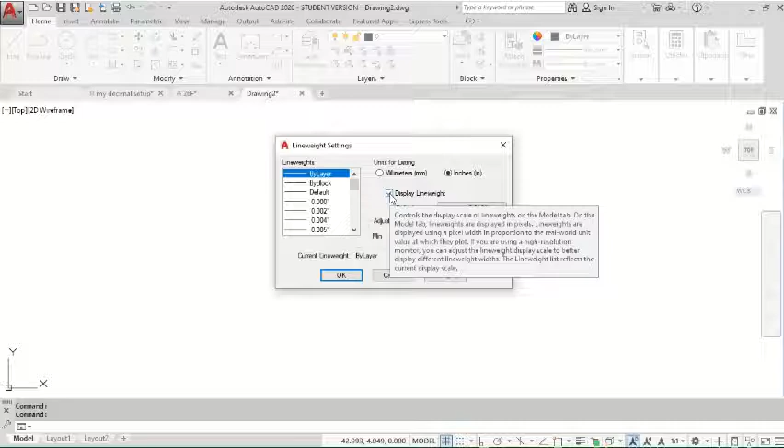On your line weight settings down at the bottom, right click on that and select Line Weight Settings, or you could go all the way back in through Options, but right click on your button on your access bar, it's quicker. We want inches, we want Display Line Weight, and we want to pull this back. They have it set to just below the halfway mark, so we'll pull it over to about where they have it. And okay.

Okay, so now for exercise 26A, we have to create layers, because if we look up here, we don't have any layers. So it says we're going to have to create layers, and we're going to have to load new line types: Center 2, Hidden, and Phantom 2.

Okay, so to create your layers, what you need to do is go into your Layer Properties. If you don't remember how to create line types, go back and check lesson number 3.

Okay, so you're going to go through and create these layers. Make sure that your viewport layer, your print, is turned to off. Make sure you add your center, your hidden, and your phantoms. Change your line weights and set up your colors. Once you're done, make your object line layer your current layer.

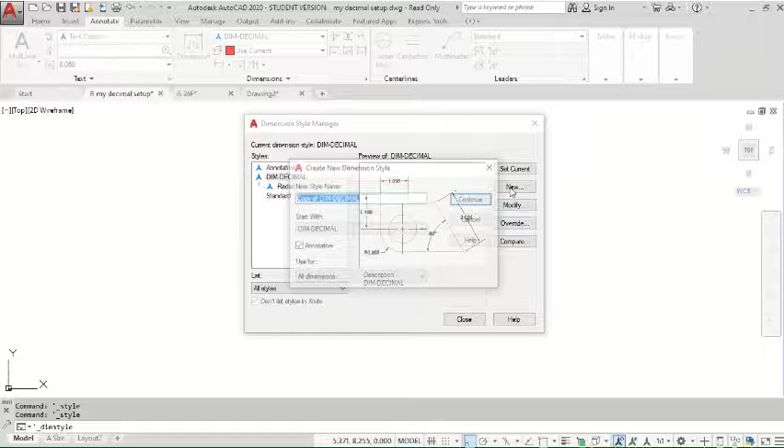The next thing we need to do is create a dimension style. So you're going to go to your Dimension tab, select the flyaway, select New. You're going to call it Dim Decimal, and make sure that Annotative is turned on. Then you need to go through the tabs and set them up to match what's shown in the Dimension Style Manager in your book. Once you're done, we want set current and close.

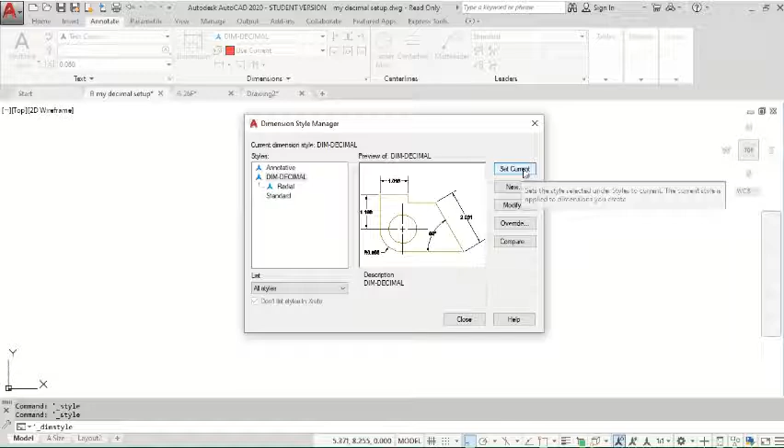Okay, so now, very important, we want to make sure we save. So Save As - they ask you to save it as a template. You can save it as a template if you want, but I'd suggest just saving it as a drawing file. Okay, so that takes us through exercise 26A.

So once you've done your Save As, for exercise 26B, we have to work on doing a page setup. So you already have your decimal setup file open. You want to then, on Layout tab number 1, right-click and bring up the Page Setup Manager. Okay, so in your Page Setup Manager, you want to do New.

We're going to do Setup1 under the name. Select the default output device. If that's your printer, just pick your printer. Since you're probably doing it at home, you could pick your own printer. If not, just select None.

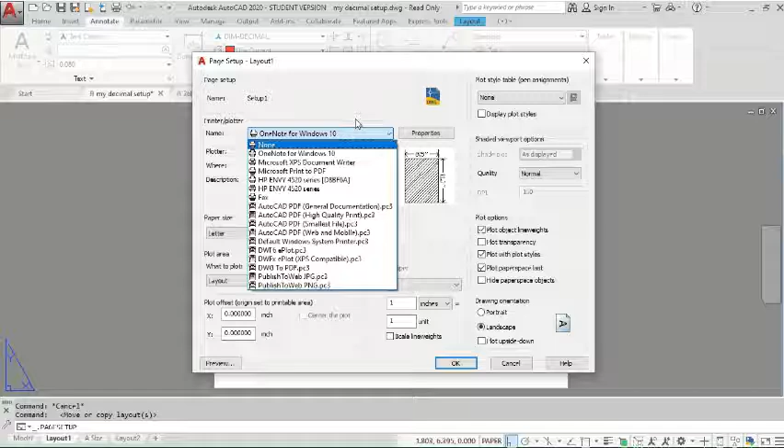Okay, so then in here, go through, set up your printer, select letter size, make sure that these are plot offset, that they're both set to 0. We want our scale at 1:1. We want it to say inches. Right now they have the plot style left at none, so we'll leave that alone. You'll end up using monochrome, but we'll just leave it set the same as what they have for now. We want to make sure that we have Plot Object Line Weights, Plot with Plot Styles, and Plot Paper Space Last, so these 3, and Landscape. Then OK.

Select your Setup1, set current, and close.

Okay, so now your Layout 1 tab, you should have a sheet of paper displayed on your screen. The sheet is the size you specified in the page setup, and the sheet is in front of your model space. So just right click on that tab, your Layout tab, and rename it to A size.

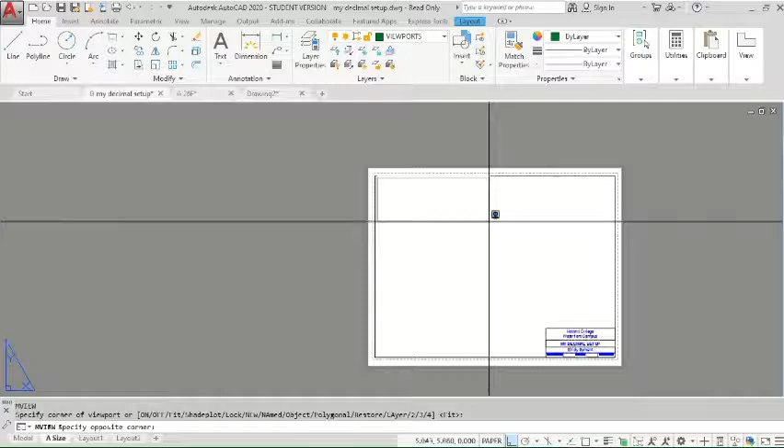We're going to type MV for make view. We're going to put our first corner up here inside of our border. So make sure your snaps are turned off. We're going to bring our second corner down inside our border just above our title block.

Okay, so we're going to confirm. We're going to click inside it, confirm that our model button is showing down at the bottom because we clicked inside our viewport, we activated it.

We're going to zoom all inside of our viewport. We're going to change our viewport scale to 1:1. And then we're going to, very important, lock our viewport.

Then you can go ahead and save again as exercise 26D. Or save as your regular decimal setup.

Okay, so the last part before the final exercise, 26E, is plotting from layout. So we have our decimal setup file open. We're going to select our A size tab. We're going to right click on it. We're going to select plot.

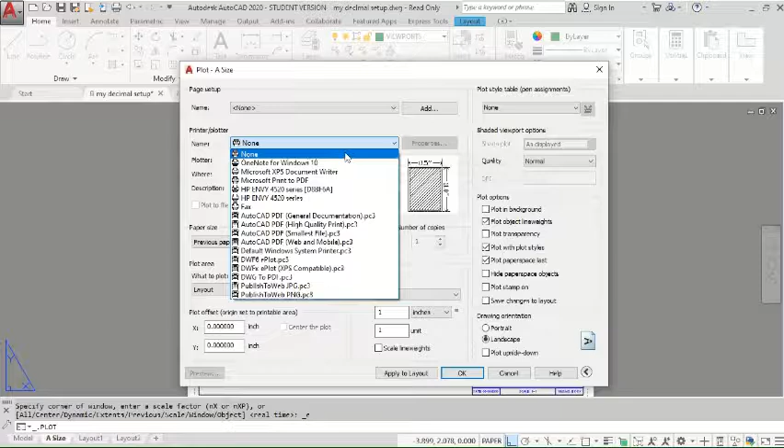If you get an error, mine's because it's looking for a printer I don't have here. Okay, so then go through, set up everything to match the settings that are shown in your book. So whatever printer it is that you're using.

Make sure you have letter, make sure you have layout, your offset is set to 0, scale is set to 1:1, we have inches, we want to switch to monochrome for our pen assignments. We want plot objects, plot transparency, plot styles, paper space, landscape,

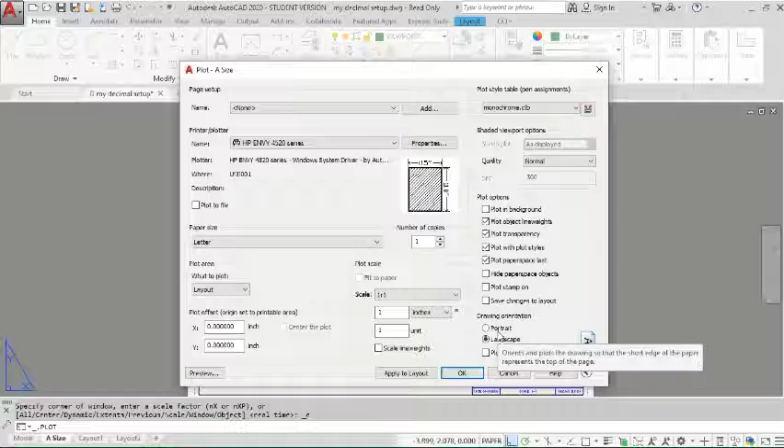and then you want to hit preview. So preview is going to show you exactly what is going to print. So you're not going to see that box for the viewport that you drew, because when you set up your layers, you turned the printer off on the viewport layer.

Okay, so as long as it looks okay, you can right click and hit exit, or just hit your X up at the top.

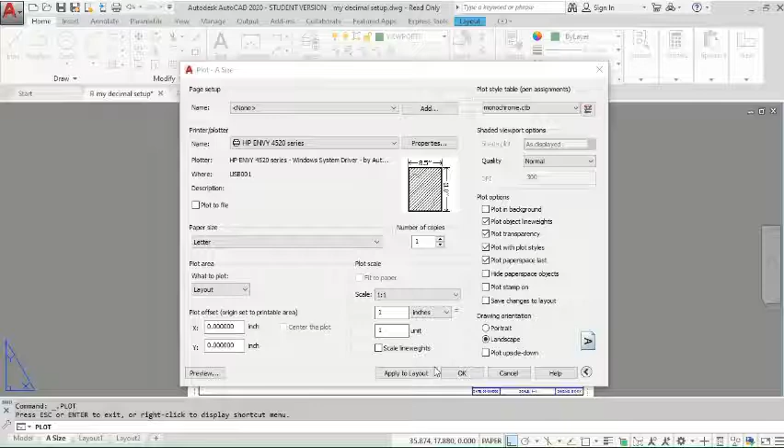Okay, so now hit apply to layout. So all those settings are saved to that tab for the next time you want to use it. And just say OK.

If your computer's not connected to a printer, select the cancel button to close the plot dialog box. Selecting cancel will cancel your selected setting if you did not add the page setup, which you did, so you'll be okay. It'll still be there.

Okay, we want to switch to our object layer, it says. And save for the last time.

Okay, so you're now ready to do exercise 26F. Okay, so exercise 26F, you're going to use your my decimal setup file. Make sure that you switch back to the Model tab.

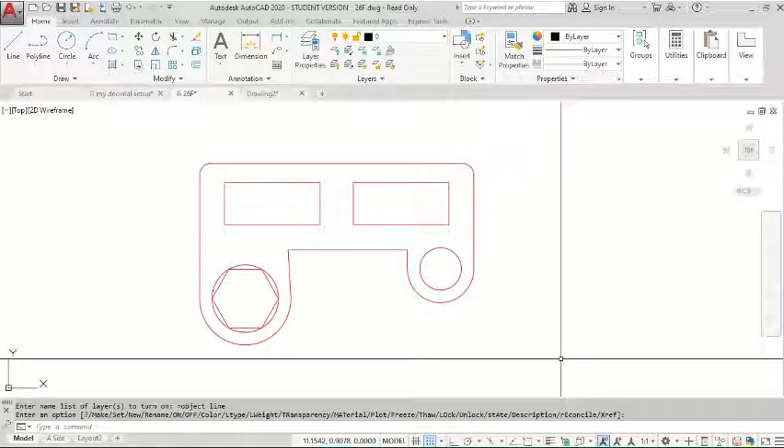Okay, so once you're finished drawing, you're going to select your A-size tab, and you're going to create 3 viewports. So MV, and then draw your viewport. I'll just do one of them here.

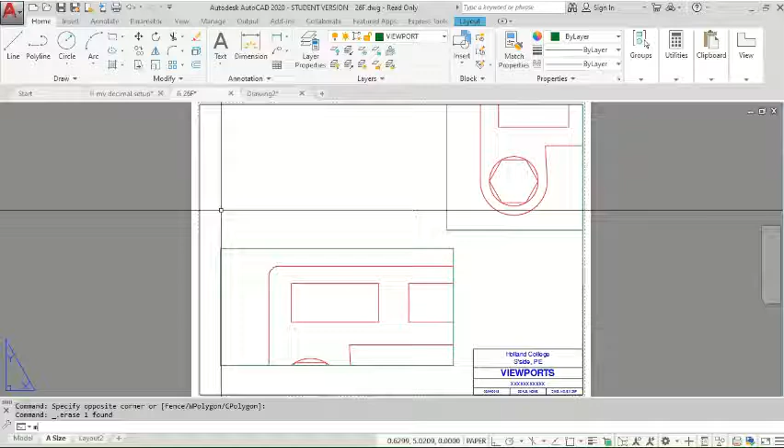Okay, so just to remind you, MV, viewport. I'm going to go from, I guess, somewhere around here over to here. And click inside there, and I can move things around to where I want them to be.

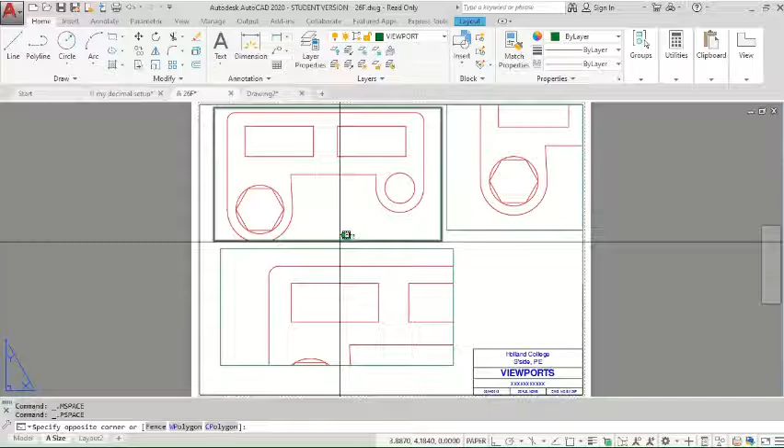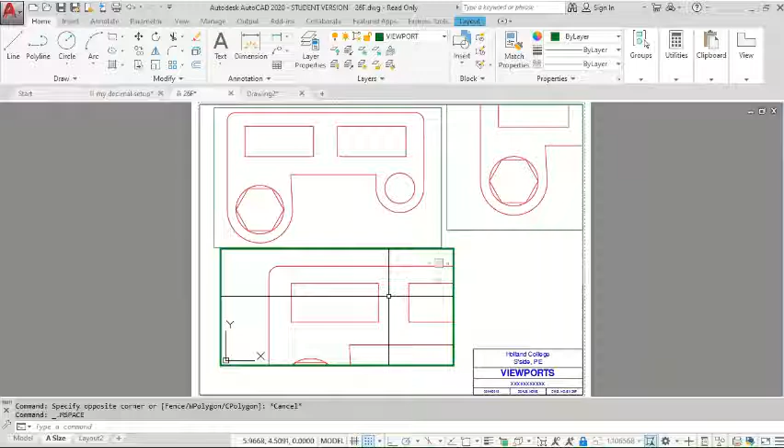Okay. Once you have it set how you want it, so once your viewport is set, make sure you hit lock. Keep everything in position. And then save it as exercise 26F.

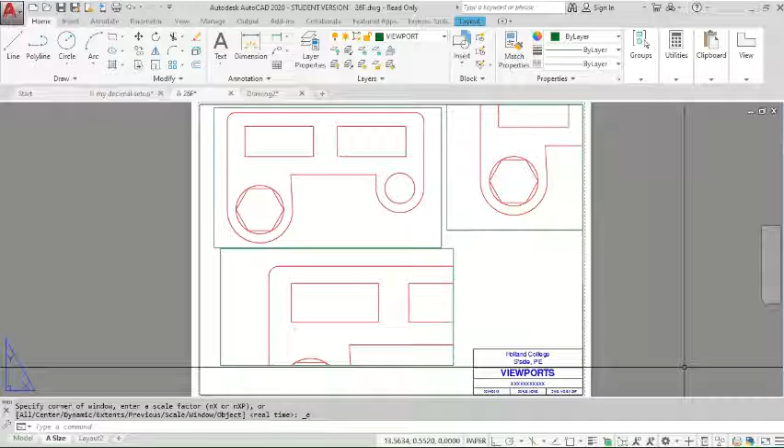If you're connected to a plotter, you can go ahead and plot using the plot setup that you did in the earlier part of exercise 26. If not, just save it. So that completes exercise 26F. That's the end of the tutorial for exercise 26F.